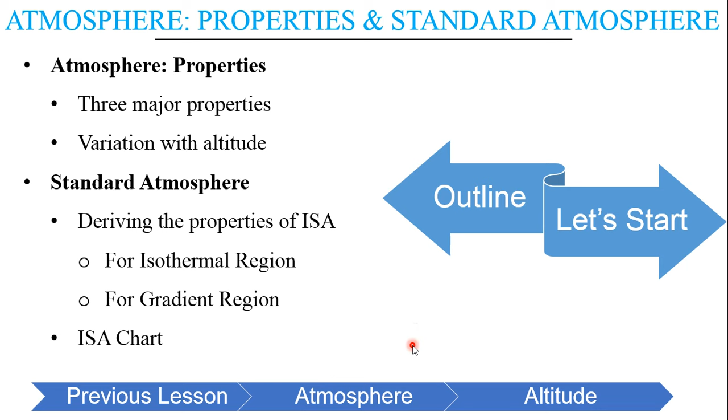In the previous lesson, we saw the general perspective of atmosphere and altitude. Let's get started. Atmosphere. We learned what atmosphere is, its major components and the basic perspective of it. Here we are going to know the basic properties of atmosphere in order to develop a standard atmosphere model through derivation.

Talking about derivations, we have to know the three basic properties of atmosphere: pressure, density and temperature. Though there are several other properties, these three are the major defining factors of a standard atmosphere model. And the main feature of these three properties is that they vary with altitude, that is, they vary as a function of altitude.

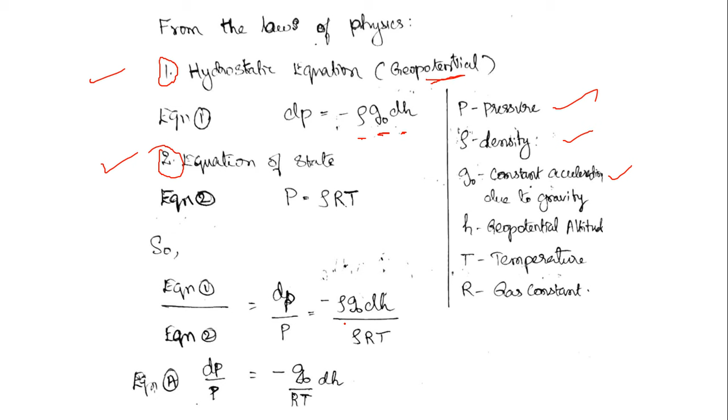So the next equation we are going to use is the equation of state. As we know, if we know the temperature and pressure, we can derive the density, and similarly vice versa. Similar to the previous method, we are dividing both equations, that is the hydrostatic equation divided by the equation of state. We obtain a similar kind of equation where the density terms are getting cancelled out.

So we are getting an equation for change in pressure by the actual pressure. Here we can see that it is a function of height. Still, we need the explanation of the term change in height. And here we can see that the pressure is in terms of change in pressure, that is dP and not P. So we need to integrate it in order to cancel out the differential term.

We will be deriving for two different cases, that is the isothermal region case and the gradient region case. Isothermal, as I said, is for constant temperature, and gradient is for the varying case of temperature. First, we will derive for the isothermal case. So in the isothermal case, the temperature is constant.

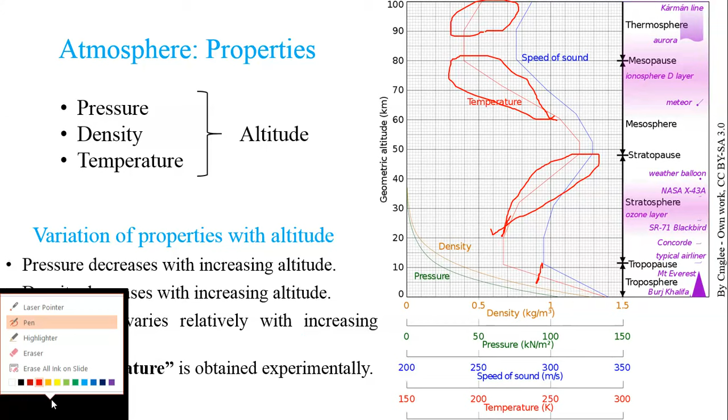So this is the actual isothermal region, which can be seen over here. The temperature is constant; the straight line is along the vertical axis. So this is zoomed in for our purpose. And we consider the properties at the base of the isothermal layer are known, and they are termed as T1, P1, and ρ1.

And if we need to find a property at some particular height within this isothermal region, we will consider that height as h. The height at the base of the isothermal region is termed h1. So considering what we know, we will derive what we want: the temperature, pressure, and density at a particular height h, that is the geopotential height.

So as I said, it is in differential terms. In order to get it in normal terms, we need to integrate it. So we apply integration on both sides, deriving for the pressure at a particular height h, so from P1 to P and h1 to h. g naught and RT, that is the gas constant and the temperature, are constant, so we are just taking them out of the integration.

When we integrate, from the integration formula, the integral of the inverse times the differential term is the natural log, ln of P by P1. And similarly, integrating the dh term, we can write it as h minus h1. So as a result of integration we are obtaining the pressure at height h, and we know the pressure at the bottom of the isothermal layer.

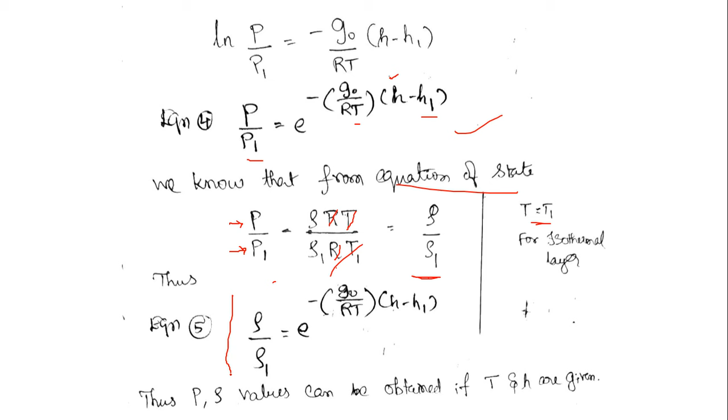So basically for isothermal region, the change in pressure is equal to the change in density with the altitude. So both are having the same relation. So here we can write the same relation of change in pressure as for change in density. So thus we have derived for the isothermal region.

Now we have to derive it for the gradient layer or gradient region. For the gradient region, we know the temperature isn't constant and it is varying with increase in altitude. So here we need to introduce the term lapse rate, as I discussed before. Lapse rate is nothing but the change in temperature divided by the change in height or altitude.

So if we consider the conditions at the base of gradient region as T1, P1 and rho1, and at a particular observation height h, the conditions or properties are termed as T, P and rho. We can write the lapse rate as change in temperature dT by the change in height dh. So we need the term dh over here in order to substitute in this equation.

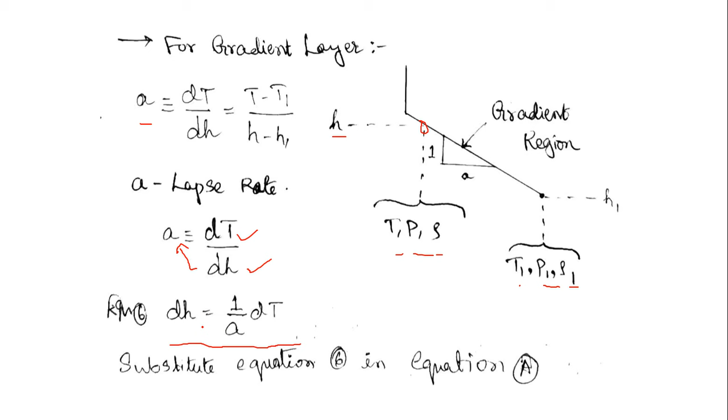So dh is required. For obtaining the dh, we will rearrange the equation, that is take this dh term to the left hand side, and when we bring the lapse rate term to the right hand side, it turns to denominator. So we are getting a relation for the change in height dh. So the value for dh is obtained.

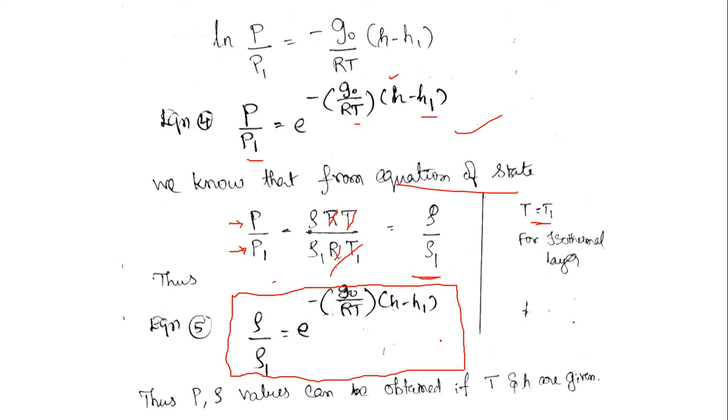So when we substitute the value of dh in equation 6, that is this equation or equation a, we will obtain a relation similar to this. So basically it is having a, and the common terms are grouped over here. So as I said, it is in differential form. In order to get in normal terms, we will integrate it in order to cancel out the differential terms.

So when we integrate it on both sides, we are taking the g0 by aR, that is the lapse rate and gas constant term, outside, and we integrate it for the two cases, that is P1 to P and T1 to T, that is observing height h1 to the height h, where we need to find the properties. So when we integrate it, the result is ln, natural log of P by P1, is equal to minus g0 by aR, which is the constant term as it is.

And when we integrate this term, we are obtaining the natural log of the T by T1 term, similar to this. So here we need to cancel out the ln terms on both sides. So we will just raise it to the power of e on both sides. So the ln and the e terms get cancelled out, and the remaining term, which is outside of the ln, gets into the power of the term.

So here it gets cancelled out for this case. For T by T1, the ln gets cancelled out, and the g0 by aR term, in terms of negative, gets into the power of T by T1. So here we have arrived at the change in pressure relation for the gradient region.

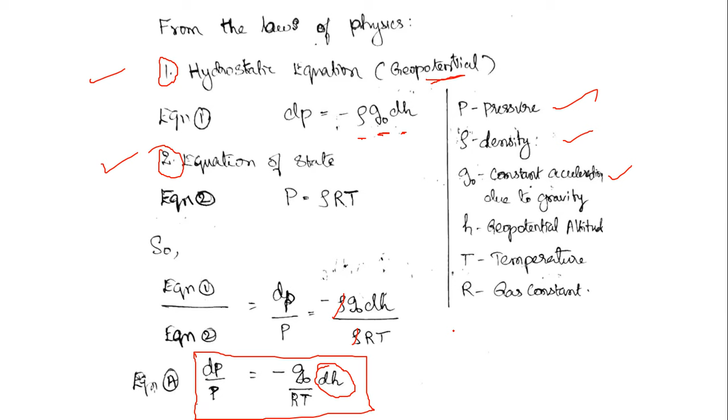And these equations are very important from the GATE perspective, as they are forming the base of many questions, or sometimes they have been asked as direct questions. They ask the formula for pressure change in isothermal region or gradient region.

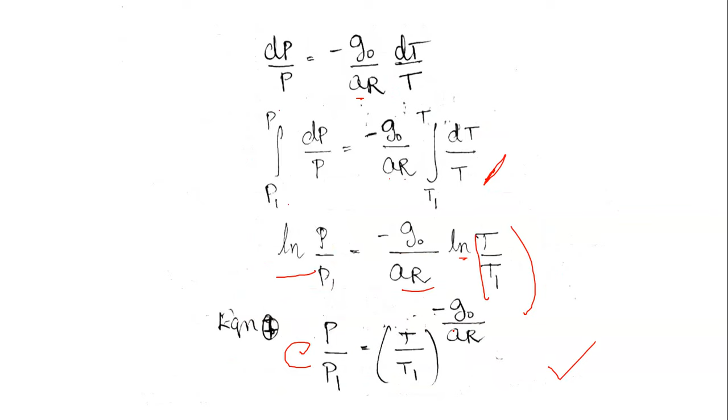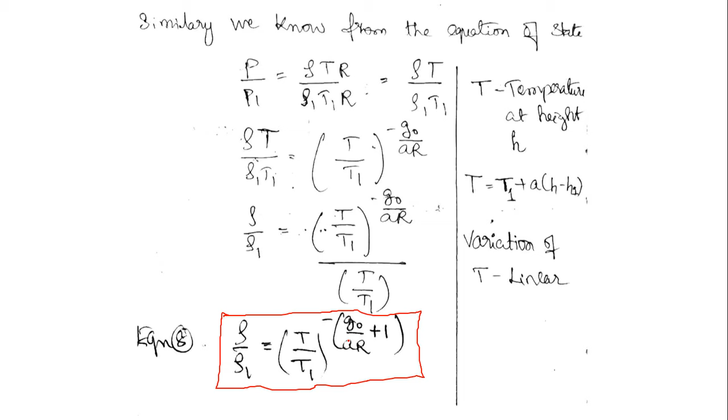So, okay, the derivation part is okay, but still it is in alphabetical terms, and we need numbers in order to pursue with our calculation. So, if we have a temperature at some altitude, how do we derive the values of pressure and density at that particular altitude? We know the altitude at which we are measuring, and we know the temperature. So if we substitute these values in these equations, that is the derivations for isothermal and gradient layer, we can obtain the properties at the particular height.

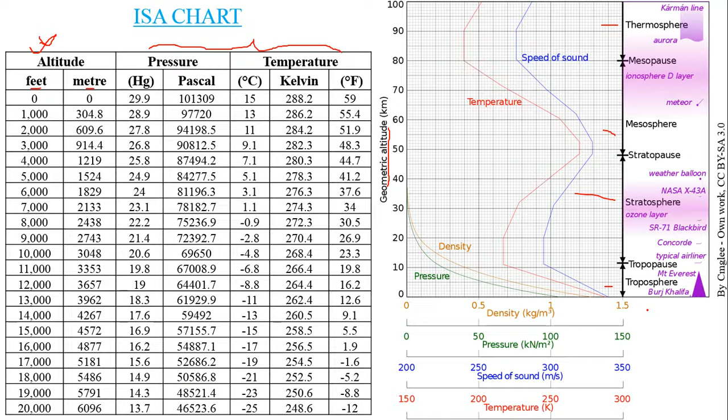We did learn about the properties of atmosphere, and we have derived and seen the international standard atmosphere chart of the standard atmosphere model. That's it for this session.